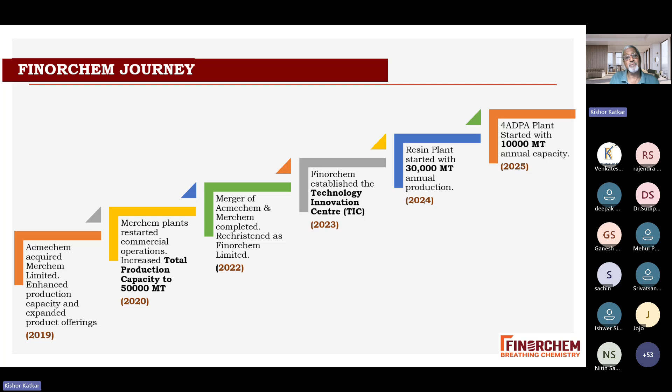Just to go very fast, we have all the standard antioxidants like 6-PPD, TMQ. In addition, we have 100, that is DTPD. Many big companies have stopped this production, but we continue and we are running full production. And then additional BL50, these are acetone condensates. We have some non-staining antioxidants of the MBI series, as well as CPL and 445.

Peptizer, again, I told you, we used to have a PCD base, which we have stopped. Now we have an environmentally friendly DBD based peptizer. Then all standard accelerators like MBT, CBS, sulfonamides. The green I have mentioned deliberately, these are the new products which I will just touch on. TBSI, this is a new sulfonamide, which will be replacing DCBS because DCBS is on the borderline of nitrosamine. In Japan there is a restriction on the volume, so we will not go there. Then DN, this is a one-pack accelerator mix for EPDM.

Then a lot of processing aids. Again, you will see the two green ones, Acmetol JV46F and Acmetol S 2000. These are basically for silica, good dispersion. Then silica coupling agents like Finosil 69, SI69 equivalent. Then carbon black coupling agents like Mernox MMH, and IDH. These are all equivalent to Otsuka products.

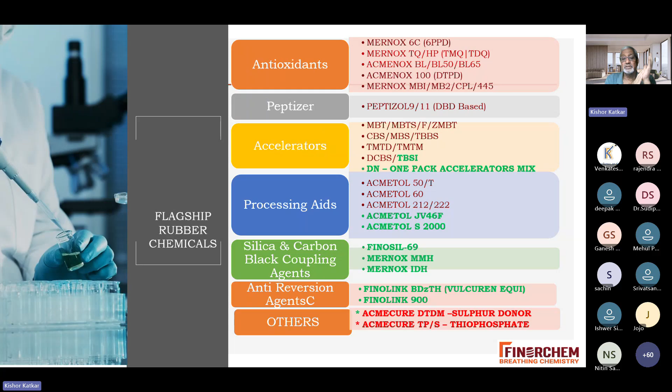Then I told you in 2024 we started the resin plant. We have all types of resins, tackifier, super tackifier, then heat reactive resins. I will not go into that; maybe another special lecture we will take.

Cut and chip resistance, it is an Indian product, CCR 120. These are improvements for the conveyor belts which are used in the minings.

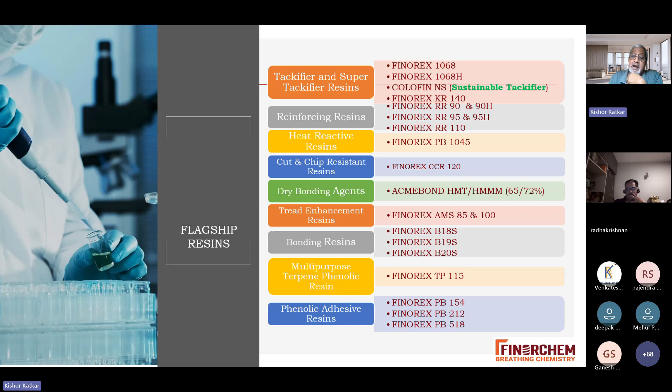So with this overall, we'll not go into details about the product, but we have the widest range of rubber chemicals, specialty rubber chemicals, anti-reversion agents, and resins. So with that, I'm going to our topics of today.

So my flow will be vulcanization in brief, sulfur accelerators, other crosslink systems, retarders, and the nitrosamine issue.

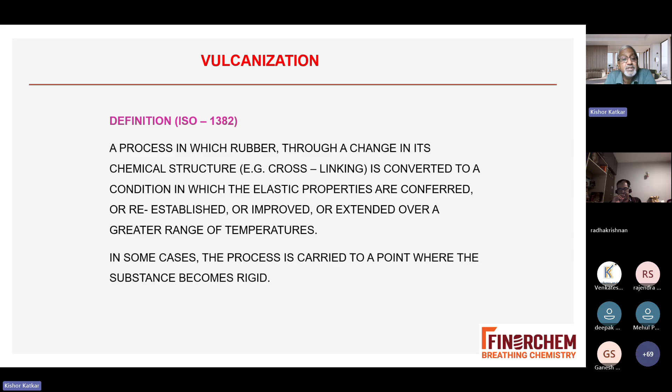What is vulcanization? A process in which rubber, through a change in its chemical structure, that is crosslinking, is converted to a condition in which the elastic properties are conferred, because rubber itself is elastic, or re-established, or improved, or extended over a greater range of temperature. In some cases, the process is carried to a point where the substance becomes rigid, that is ebonite.

Properties of vulcanizate are of two types. One depends on the network structure, which is basically from the vulcanized systems, and the curing systems participate. Depending on network structure: elasticity of the rubber vulcanizate, resilience, wear and tear properties, tensile strength, tear strength, abrasion resistance, modulus, hardness. So all these depend on the network structure, that is vulcanization, the crosslink system.

Aging properties are, to some extent, you will be surprised, because we always think whenever aging comes, you are concerned with the antioxidant you can improve, but no. Even the network structure also contributes to the aging property to some extent.

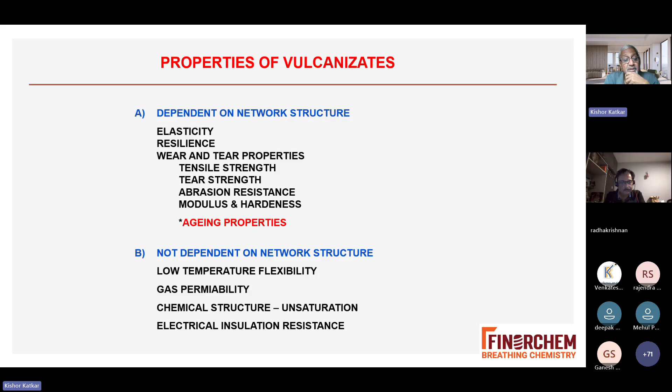There are some properties which are not dependent on the network structure, mainly on the polymer: low temperature flexibility, gas permeability, chemical structure that is unsaturation, and electrical insulation resistance.

Incubation period is a warming up period. Rubber compounds get heated to curing temperature due to the thermoplasticity of uncured rubber. Modulus comes down; this is a physical process, there is no chemical process. Rate of warming up depends upon the temperature difference between the heating medium and the rubber compound, thermal conductivity of the rubber compound, and the configuration of the rubber part.

Rubber compound is a very bad conductor of heat, and in case of thick articles, the warming up period can be very long. You may have to do separate warming of thick articles either by electrical heating or hot air, in order to give a lower vulcanization time.

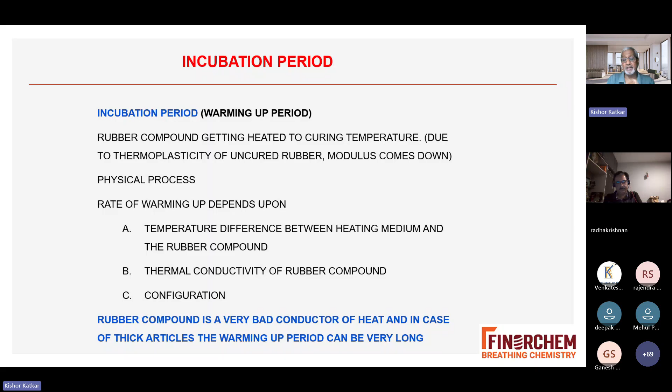Induction period is nothing but the scorch time or mold flow time. It's the time interval at the curing temperature during which no measurable crosslinks can be observed. This period depends upon the polymer, curing system, and heat history. Induction period is a safety margin in processing of the stock, and it indicates the storage life of the stock. Induction period must be adequate for the processing involved, and it continuously gets reduced during processing or storage at high temperature.

So again, it depends on whether it is a simple molding or whether you are building the product. This scorch safety is very important for that type of product when your product is being built, whether it is a hose, whether it is a tire, whether it is a conveyor belt.

Too long curing time in hot air or open steam curing is a disadvantage, so where you require a very short curing time, if it is long, you will find sagging and de-shaping of the product in hot air cure. Too short, you get scorching during processing, improper fusion of components, flow cracks, and bad knitting during molding.

These are all important to reduce rejection, because if curing is too short, your proper product will not be there—there will be cracks, flow will not be proper. This is all very important, because I am telling you, for the non-tire industry this is very, very important. We do a lot of good formulation, we use good polymers, we use good raw materials, but we don't give importance to the processing as well as the proper vulcanization system.

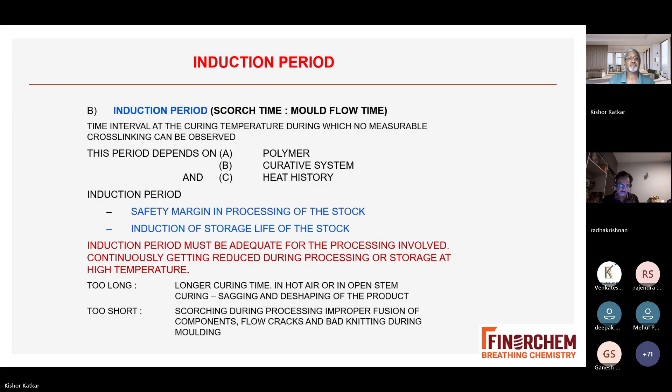Vulcanization time: the major part of the cure time should be short to achieve a faster production cycle. Again, this depends upon the product.

The plateau is a very important part. It is the time period at curing temperature during which the physical property remains constant at the maximum value.

Why is it important? Because a long plateau is essential under practical conditions. During production at the factory level, particularly in non-tire products, overcure cannot be avoided. When overcure occurs, the curing will be non-uniform, the properties will be non-uniform, and then your performance will be non-uniform.

Curing of thick articles: the temperature at the center may not even be attained. This happens when you have thick articles like dock fenders, solid tires, rollers, engine mountings, pre-cured tread.

When you are curing this, what do you observe? During curing of a thick article, the temperature at the center may not even attain the cure temperature by the time the external surface is cured. And by the time vulcanization is complete at the center, the external surface is overcured. So this is a very practical problem.

So how do we handle that? This is very important because once your vulcanization system is better, giving a good plateau, some variation in the vulcanization time will take care of uniform physical properties even for thick articles.

There are also V belts and conveyor belts. These are also thick and long rubber articles. They are normally produced discontinuously with overlap joints, and the joints end up getting a double cure. Normally now people are using roto cure, etc., where continuous curing is done.

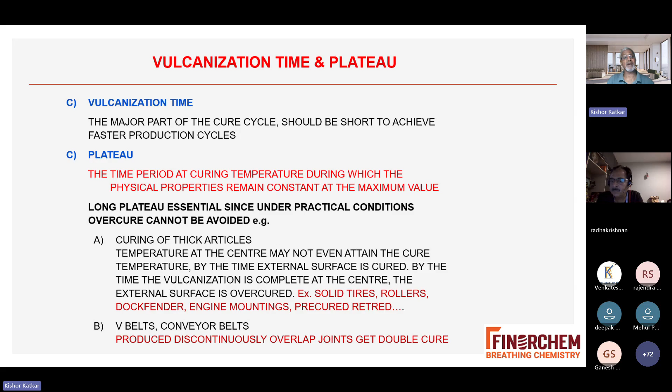Reversion: in spite of that, what we observe is that only in the case of natural rubber, polyisoprene, and butyl—wherever double bonds are more—with a normal sulfur cure, reversion occurs.

What is reversion? Physical properties like tensile strength, tear strength, modulus, and hardness drop. Elongation at break increases because elongation is inversely related to modulus. The surface may become tacky because if hardness and modulus go down, the surface becomes tacky, and resistance to aging goes down.

Degradation of physical properties is due to partial loss of cross-linkage during the breakdown of polysulfide cross-linkage. You can see here the vulcanization curve of modulus against cure.

In case of natural rubber, once you get the optimum cure, if you continue the vulcanization, you will get reversion. Your modulus comes down, and obviously the performance comes down as well.

In the reverse case, with synthetic rubbers like SBR, polychloroprene, nitrile, with certain cure systems, what you observe is marching modulus. What is marching modulus? The modulus will continuously go up—even after vulcanization, even during service, the modulus keeps increasing. But that is also not acceptable.

Suppose you want to maintain the hardness for something like pre-cured tread or tread in a car tire—you want to maintain a hardness of 64, 65. But because of this effect, the modulus will go up and your physical properties will change. That is also not desirable, but okay, we will discuss that.

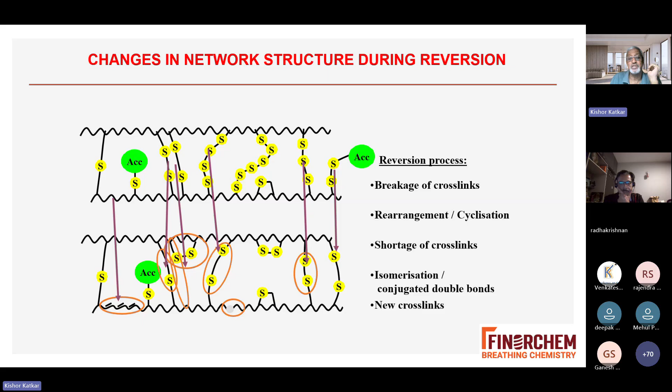And obviously there is a new crosslink also happening wherever there is a pendant group of sulfur. Now, sulfur cure with normal sulfur, when you are using 2 to 6 part, what you observe is monosulfide, disulfide, and polysulfide. Mono and disulfide linkages are thermally stable, and polysulfide linkages are unstable.

Why? Because if you look at dissociation energy, in carbon-carbon, which normally happens in peroxide cure, the dissociation energy is highest at 335 kilojoule per mole. When you go to monosulfide it is 310, disulfide it is 280. But when you have polysulfide, you can see 142. So when the sulfur is more than 4, the dissociative energy required to break the CC bond is much lower.

That is why whenever reversion occurs, you will observe that polysulfide linkage will break down to monosulfide or disulfide. So now, why this mono, di, and polysulfide? What are the advantages and disadvantages? Because for some products, where flexibility is required, these are good—we'll see that.

So polysulfide linkage, what are the advantages? It gives better tensile strength, better tear properties, and in natural rubber, it gives flex and fatigue resistance. So there are some products where these properties are predominantly required to get the highest performance, like pre-cured tread. You have tire bonding, side wall, conveyor belt—these are very important.

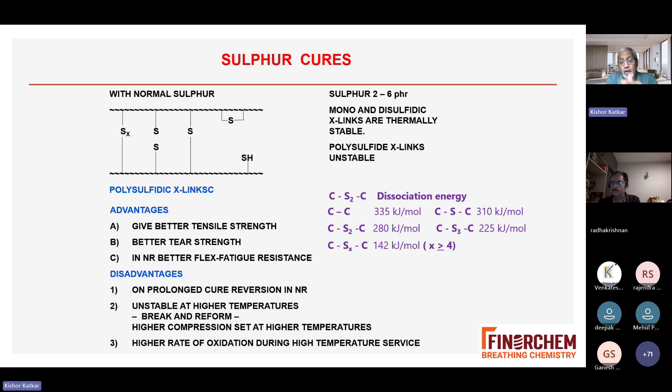We'll see what are the disadvantages. On prolonged cure, reversion happens in natural rubber, as we saw in the previous slide. It's unstable at higher temperature, breaks and reforms. Higher compression set at higher temperature, because once your polysulfide linkage is broken into monosulfide or disulfide, compression set at higher temperature will be higher, and there's a higher rate of oxidation during high temperature service. Even aging properties get affected. Though you can partially compensate using antioxidants, if you have overcure, I'll show in the next few slides how even aging properties get affected.

Normal sulfur system is normally above 1.5 phr, but you have seen the advantage in natural good wear and tear property, good flex property. Disadvantages are reversion, poor aging characteristics at high temperature, poor compression set—resistance at high temperature is less. Now, what are the options?

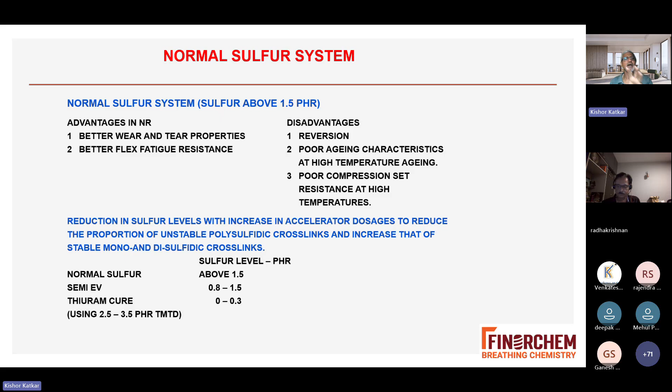Semi-EV is a compromise between normal sulfur and EV system, around 0.8 to 1.5. Thiuram cure is basically a sulfur donor system, around 0 to 0.3 of sulfur, where you use sulfur donor at 2.5 to 3.5 phr. We will touch on this a little on the next slide.

Now you can see here the modulus with normal sulfur, semi-EV, and EV. As your cure time increases, with normal sulfur there is reversion, modulus will come down. EV gives you a slightly plateau, your modulus is maintained, and semi-EV is a compromise between normal sulfur and EV system.

Now you can see, for the same product, if you do aging, tensile retention versus aging period at 100 degrees centigrade by days. Normal sulfur, even during aging, the tensile retention is much, much lower. EV is better than normal sulfur and semi-EV, but Thiuram, the sulfur donor system, gives even better aging properties at 100 degrees centigrade.

So what is a sulfur donor? Chemicals which during cure release sulfur to give only mono and disulfide crosslinking. What are the sulfur donors? TMTD acts as a secondary accelerator as well as sulfur donor. TBZTD is a nitrosamine-free accelerator, also a secondary accelerator as well as sulfur donor. And DTDM, dithiodimorpholine, is only a sulfur donor, not an accelerator.

So TMTD, Thiuram, acts with a dual character as secondary accelerator as well as sulfur donor.

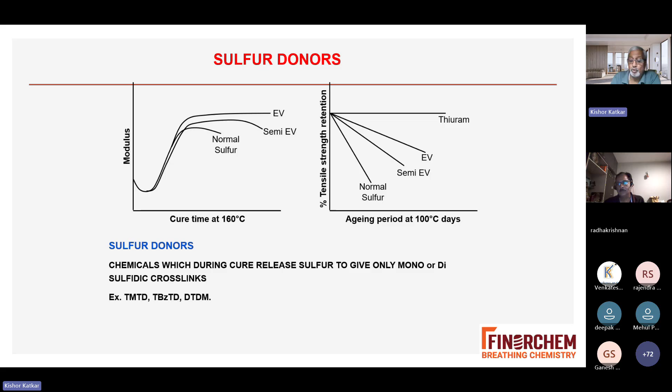Now, optimum cure. The rheometer gives changes in shear modulus with cure time. You can see in the graph T90 and T100. So how do we come to a conclusion about optimum cure? It's very simple, people say go by rheometer to find out T100. No, now you can understand what I'm talking about.

Rheometer gives changes in shear modulus with cure time. Optimum time is taken at T90 because properties like tensile strength and tear strength are about their maximum at this stage of cure, since we normally talk about tensile and tear strength. However, not all properties of the rubber vulcanizate are at their optimum at this stage of cure. Tensile and tear are there, but you can see in the next few slides which properties are not optimum at T90.

If other properties are important, then these properties may attain their optimum value at a different stage of cure, which is very important. Optimum time is to be taken as the cure time at which the most important property desired in the final product is at its optimum balance.

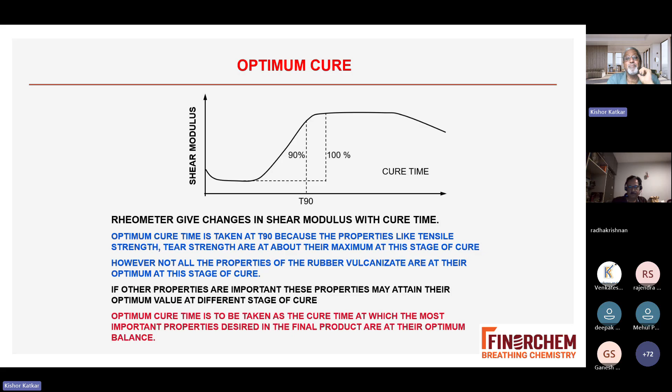Now you can see here, optimum cure for different properties. Tensile is normally, as I said, tensile and tear, you get T90. Afterwards there will be a drop in the tensile. If further curing takes place, that is called reversion. Hardness you can see is still slightly on the higher side. Modulus you can see, and elongation.

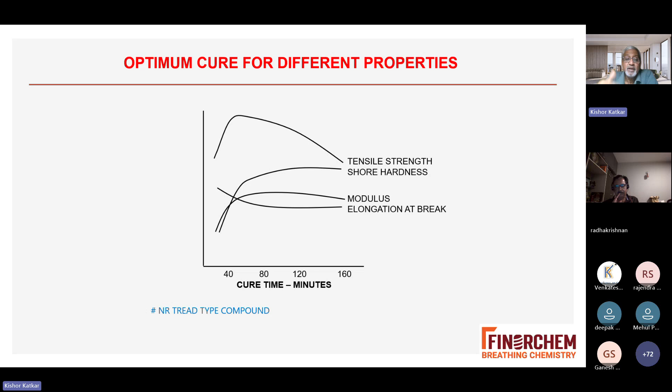These are with a natural rubber tread compound. Now you can see other properties.

In short, we will not go into detail. For each property there is a different timing of optimum cure. So your optimum cure will depend on which property you are looking for and which property is important for the final product's performance.

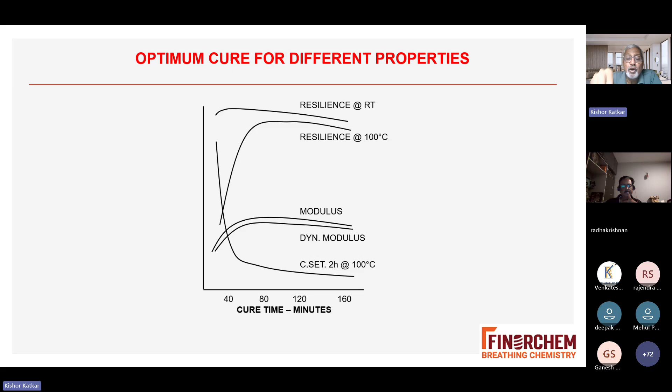Obviously, you have to add minutes to the cure time depending on the thickness of the part. That is additional. Now here you can see I have mentioned that even aging property is important.

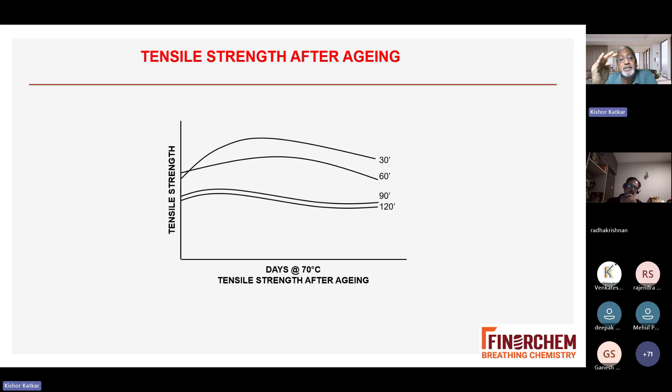In this case, tensile is cured at different timings - 30 minutes, 60 minutes, 90 minutes, and 120 minutes. What do you observe? 30 minutes gives the higher tensile originally, and 120 gives the lower. When you age this product, you will find there is a drop in the tensile strength. The higher the temperature during cure and the higher the time beyond optimum cure, the more you will find a drop in the tensile also. So these are also important.

Now, vulcanization comes with different degrees of steepness. You can see the first case here - this is the vulcanization system with a shorter reaction time, you go here and then it goes like this. Then you have the vulcanization system with a longer cure reaction time, it goes like this, like this, like this. So it is a long reaction time.

Then there's the vulcanization system with a marching modulus. You can see this is the vulcanization modulus, and this is your system with a long reaction time. In case of marching modulus, you can see it is not optimum yet, it goes on increasing. Then the ideal would be rectangular curves - you get very good scorch safety, a faster cure, and then a plateau.

So ultimately, the rubber technologist wants to optimize this - the curing system should be like that. Yes, it is possible to do that by using a mixture of accelerators, proper accelerators, and sulfur ratio, which we will see.

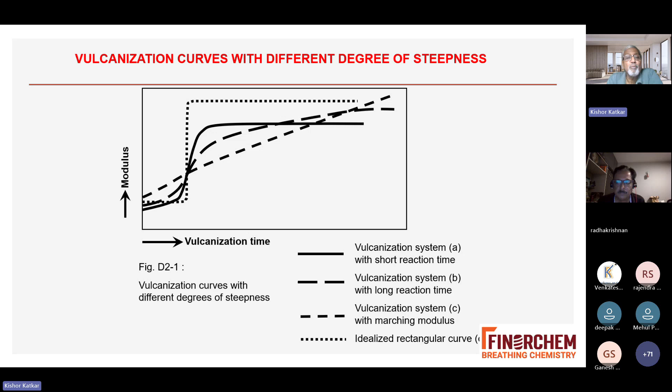Practical vulcanization. Temperature depends on the type of product, polymer and curative system, and the equipment and process used for vulcanization. Now you have heard about cold cure or room temperature cure, which is around 20 to 40 degrees - normally repairing of patches is cured at room temperature.

Hot air, 70 to 140 - so you can't go more than that. Steam cure, 100 to 200 degrees. And there are special cures like liquid curing medium, ultra high frequency, injection molding, electric heating, where your temperature can go up to 240 degrees centigrade.

Now, first, what are the requirements? External pressure - when is it required, why is it required? Unvulcanized rubber may contain traces of moisture from rubber compound ingredients, dissolved gases, traces of solvent - if solvent is used during processing, many people use it in hoses or during the bonding process, something like that. Sometimes moisture is generated during vulcanization, and sometimes moisture even comes from the compound itself.

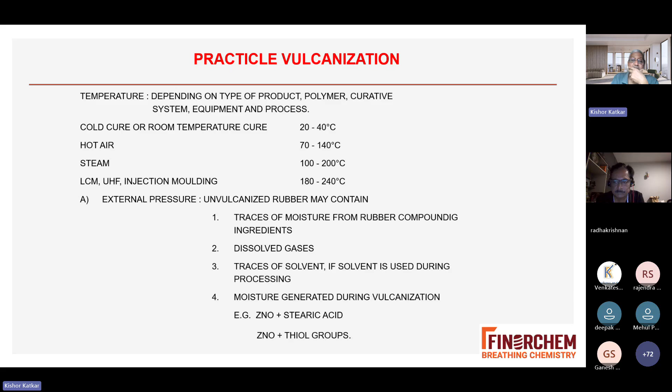Moisture generated during vulcanization reaction of zinc oxide and stearic acid, and zinc oxide and thiol groups, gives moisture that becomes part of the rubber compound. If this moisture remains and you don't give pressure during vulcanization, you will find bubbles in the rubber vulcanizate.

In case of cure temperature below 100 degrees, or in case of very thin rubber film like rubber threads, glues, or fabric, no external pressure is generally necessary. In hot air cure or latex cure, there is no pressure.

For cure temperature above 100 degrees, external pressure slightly more than the saturated steam pressure at the curing temperature is necessary. For example, suppose your curing temperature is 142, which is equivalent to saturated steam of 3 atmospheres. So above that, 1 to 2 means external pressure should be 4 to 5 atmospheres to keep the mold closed and give pressure during vulcanization, so that there will be no faults in the rubber vulcanizate.

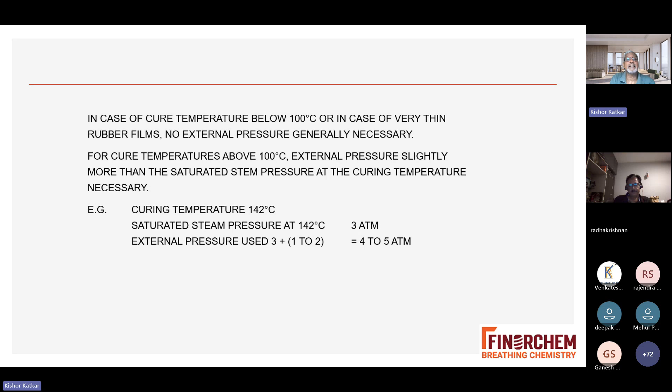Now, after this vulcanizing system, we will go for what type of accelerators and other curing systems will be there. Someone not from the rubber industry will ask, if an accelerator is required, why not just a few accelerators? It would be very comfortable for rubber technologists. But no, there are so many accelerators. We will go into a little detail on that - why so many accelerators are required, what are their functions, and how rubber technologists can utilize these accelerators to get better, optimum cures, faster cures, and no reversion, etc.

Now, curing system - what is the curing system? Selection of curing system is based on the base polymer. Natural rubber, nitrile, whether a double bond is there, whether it is saturated, EPM - a lot of things are there, that is the base polymer. Whether a double bond is in the main chain or side chain, and whether I can use a sulfur accelerator system, depends on the base polymer.

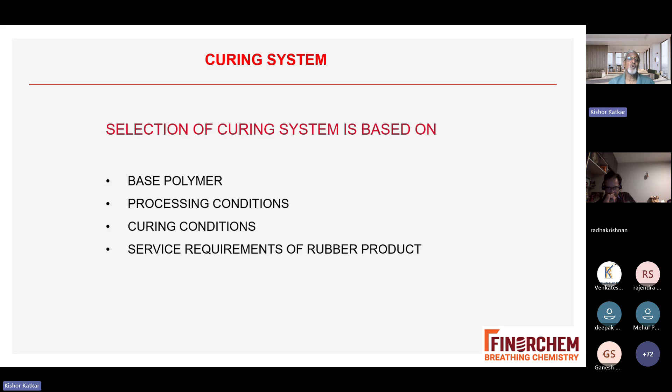Processing condition - what type of process, whether it's hot air cure, liquid cure, HAV cure, or continuous cure like for hoses, etc. Curing condition also, then service requirement of the rubber product - these four conditions are very important.

Now curing system - we have seen it depends upon the base polymer, properties, etc. What type of curing systems are there? The most important - almost 85% of polymers use sulfur or sulfur-bearing material, because tire is almost 70% and tire uses sulfur and sulfur-bearing, plus non-tire. That is why 85% is sulfur-based. It's very comfortable, very economical, where we can use natural rubber, isoprene, synthetic natural rubber, SBR, butyl, PBR, EPDM, nitrile, XNBR (carboxylated nitrile), and HNBR (hydrogenated nitrile). All these rubbers have a double bond either in the main chain or side chain, which is required for sulfur accelerator crosslinking.

Organic peroxide - this is very important. What do you do when there is no double bond, like EPM, silicone? These saturated polymers don't have any other option - you have to use organic peroxide. But even for some polymers where you require special properties and good compression set, want a cleaner vulcanizate, lighter color, and don't want contamination - even polymers like NBR, PVC, HNBR can be crosslinked with organic peroxide instead of sulfur accelerator. So EPM, EPDM, silicone, urethane, chlorinated polyethylene, cross-linked polyethylene, VAMAC, PVC, NBR, HNBR - these polymers can be crosslinked with peroxide. Obviously, saturated rubber has to be crosslinked with peroxide.

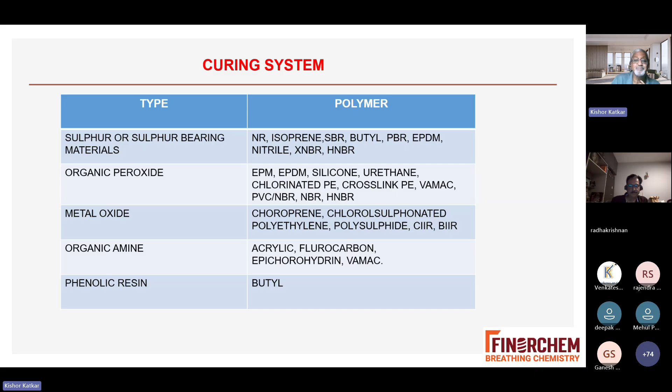A good curative system should give adequate scorch safety, fast rate of vulcanization, long plateau, and vulcanization with good physical property and good aging property. Obviously, once you get this, better performance.

Curative systems are decided by curing characteristics, design in the manufacturing process, and the functional requirement of the vulcanizates. This is very important - it depends upon the polymer, the manufacturing process, and very importantly, the functional requirement of the vulcanizate, whatever product you are manufacturing.

Different curing characters are desired in compounds designed for hot air cure. What is normally needed for hot cure? Very fast onset, because otherwise sagging and stickiness will happen as the surface gets oxidized, since in hot air, oxygen is present. So very fast onset of vulcanization, fast rate of cure at lower temperature.

As we have seen, at around 100 degrees in hot air cure, your balloons or textile fabric, gloves, latex - these are cured at a lower temperature. Open steam cure also requires fast onset of vulcanization, as there is again a possibility of oxidation and sagging and spotting in steam cure. So fast onset of vulcanization is required to get a proper shape.

For compression molding, adequate mold flow time is needed - it has to fill the mold properly. For injection molding, adequate mold flow time is required because injection molding is done at a higher temperature for productivity, so the mold should be completely full. So adequate mold flow time and good reversion resistance is needed, because many times in injection molding, the material remains in the sprue, so it should not overcure and there should not be reversion.

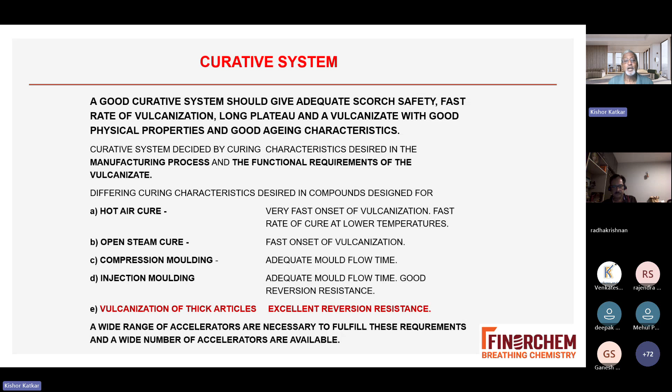A wide range of accelerators are necessary to fulfill these requirements, and a wide number of accelerators are available. Now you can understand why so many accelerators exist, and why many times you have to use a combination of 2-3 accelerators.

Accelerators are chemicals which increase the rate of vulcanization of rubber compounds with a crosslinking agent like sulfur. Now you understand who was the creator? Goodyear was the creator of vulcanization. He first used heat, and by that the rubber was vulcanized or cured, but the process was very slow. So in order to increase the cure rate, the accelerator was invented, and different accelerators came about.

What are the advantages of using accelerators? It's not only the rate of cure, but there are many advantages. First, increased output, reduced variability of cure. By using a proper accelerator or sulfur-accelerator combination, you can get a consistent cure rate, better physical properties, consistent physical properties, better aging properties, and better color of vulcanizate.

Why am I mentioning this? When you cure at higher temperature, this is more applicable to non-black products, white or colored products. If cured at higher temperature, you will find the color will be a darker or blackish shade. So if you want good color, you have to cure at lower temperature, and accordingly use the appropriate accelerators.

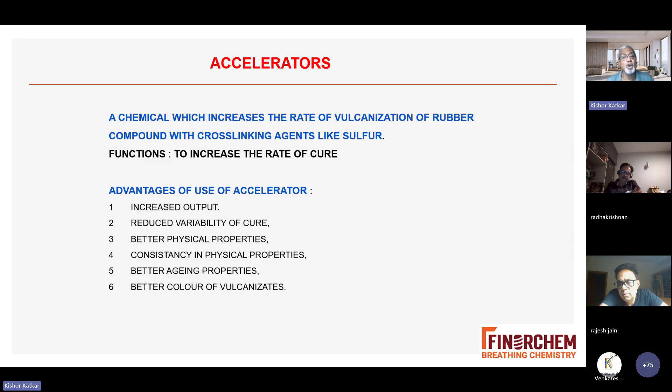Besides this, there are FDA accelerators. I think Mehul Patel was talking about nitrosamine-free, FDA approved, SVHC, and a lot of things are there. We will not go into that, but these are the basic advantages of using accelerators along with sulfur vulcanization.

What is the curative system? It consists of the type and amount of accelerators and the amount of sulfur in case of GP rubber, that is general purpose rubber. What are the general purpose rubbers? Natural rubber, SBR, polybutadiene - these are the general purpose rubbers. Why are they called general purpose rubber?

Rubbers which are mainly used by the tire and allied industry are called GP rubber. Obviously other rubbers can also be crosslinked - I told you NBR, IIR, EPDM, XNBR, HNBR, because they have double bonds either in the main chain or in the side chain, which can be used for crosslinking with sulfur and accelerator.

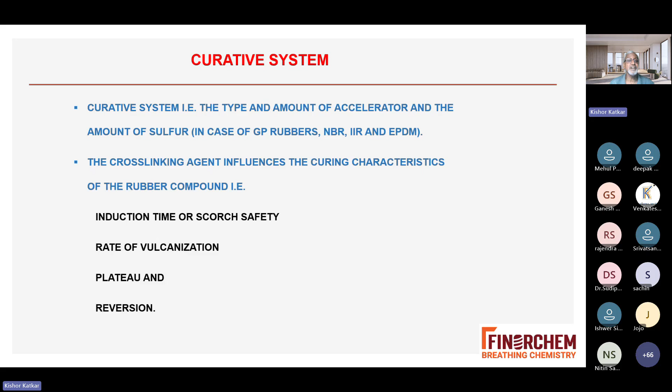The crosslink agent influences the curing characteristics of the rubber compound. What type of influence do they have? We have seen the 5-point system. Remember, the curing system does not participate in or contribute to the incubation heating stage - it contributes after that, in the induction time or scorch safety, rate of vulcanization, plateau, and reversion.

Looking at major quantity polymer usage, I told you general purpose polymers are cured with sulfur as the crosslink agent - NR, SBR, IR, EPDM, etc., XNBR, HNBR, and special purpose polymers like NBR and PVC are also discussed. These rubbers can be crosslinked with sulfur accelerator. Sulfur accelerator is an economical curing system and is used mainly by the entire tire industry - that is why I told you 85% of rubbers are crosslinked by the sulfur accelerator system.

Accelerator for sulfur vulcanization - there is an old classification people used based on their activity in natural rubber based compounds: slow accelerator, normally cure temperature 120 to 140, medium fast accelerator, ultra accelerator, and super ultra accelerator for room temperature. But now the classification has changed to something more relevant.

Thiazole and sulfenamide class, thiuram class, and dithiocarbamate class - these are all acidic accelerators. And there are basic accelerators like guanidine, that is DPG, DOTG, and amine class, HMT, HMMM.

There are a lot of others we will discuss after. And there is a synergy between acidic and basic accelerators.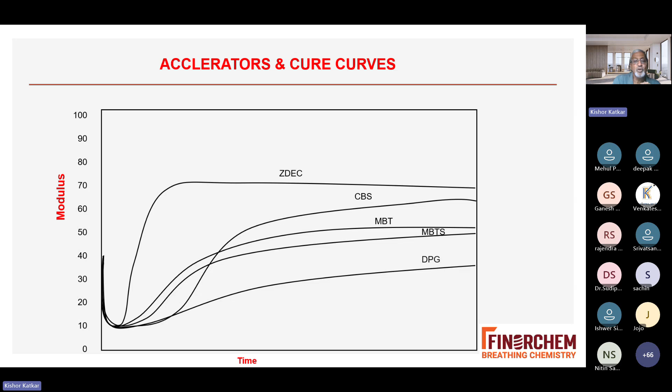ZDEC gives a very peaky cure, very short scorch time, very fast cure. So it is not normally used in general purpose rubber.

You can see even sulfenamides - why so many sulfenamides are used? CBS, TBBS, MBS, DCBS. You can see that CBS gives better scorch safety and faster cure.

So for products like molded products or in the non-tire industry, for hoses, for pre-cured tread, for small tires, you can use CBS very well. You get better scorch safety and good physical property.

But when you are going to thicker articles like pre-cured tread or bigger tires - passenger car tires or truck tires or conveyor belts - you can use TBBS type of things, which gives higher scorch safety.

There was also MBS, which has very good scorch safety and was predominantly used by the tire industry for truck tires and bigger tires earlier, mainly for bias tires, because MBS has a problem with nitrosamine, which is carcinogenic.

Slowly, people have gone away and discontinued use of MBS. Even the tire industry has stopped, and non-tire industry is also slowly moving away, because it can be replaced by CBS or TBBS easily - obviously not one-to-one.

You have to adjust some dosage, some retarder, or a combination of that. Anyone can help you in that case.

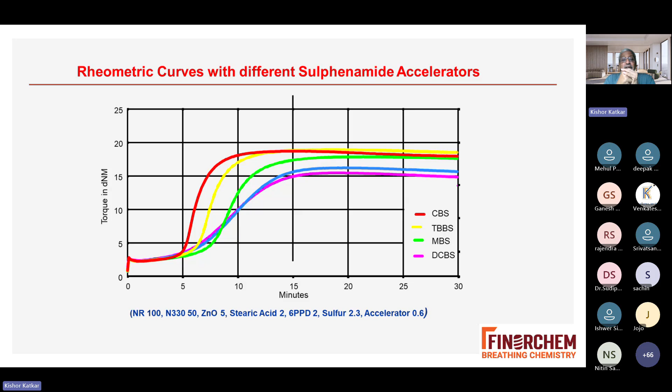I will not go into much detail on that because these are general accelerators. First, MBT, MBTS - these are thiazole, mainly used in general purpose rubber by the non-tire industry, but they are also used for butyl tube cure along with TMTD, MBT or MBTS.

The footwear industry mainly uses MBTS, but also uses F. F is a blend of MBTS and basic accelerators - a blend particularly given to the microcellular footwear industry.

This is an Indian-made product, I will tell you - this is not available outside of India. MBTS is also used for hoses, footwear, cycle tubes, etc.

ZMBT, zinc salt of mercaptobenzothiazole, is mainly good for the latex industry - a sensitizer for latex used in foam, thread, etc. F, as I told you, is mainly used for the footwear industry blend, but is also used for sponge, ebonite compound, hot water bottles, as well as airbags.

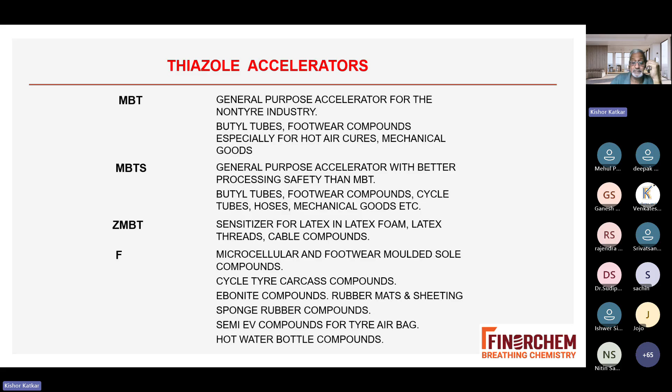Then a lot of sulfenamides, I think we discussed about that. CBS is mainly used for the non-tire industry as well as for small tires, cycle tires, two-wheeler tires, Neolite soling compound, if you want better scorch safety.

What I observed, maybe people remember, in the north side people were shifting these accelerators. In winter they want a fast accelerator because the temperature itself was low, so they used MBT, MBTS because scorch safety was getting sufficient. But particularly in summer, when the temperature goes up to 50, they were shifting from MBT to CBS because they want better scorch safety. Your compound should not scorch. We should have better scorch safety, better flow, etc.

So you can understand, even with the same formulation at a different temperature, meaning the room temperature, you can change and maintain the same cure rate and avoid rejection of your compounds.

MBS, I think we discussed about that, particularly earlier used in truck and bus. It was a very good product, very good scorch safety, very good cure rate and plateau. But unfortunately now, because of nitrosamine, it is discontinued.

DCBS, I told you, gives the highest scorch safety. So mainly it is used in steel cord compound and in unvulcanized products like hot retread, conventional system, where that hot retread has to be stored for 6 months. Normally TBBS, CBS will scorch and give the scorch. So DCBS is used in what they call hot tread or camelback compound, and cushion gum compound also normally requires very high shelf life. Obviously insoluble sulfur, there you have to use them.

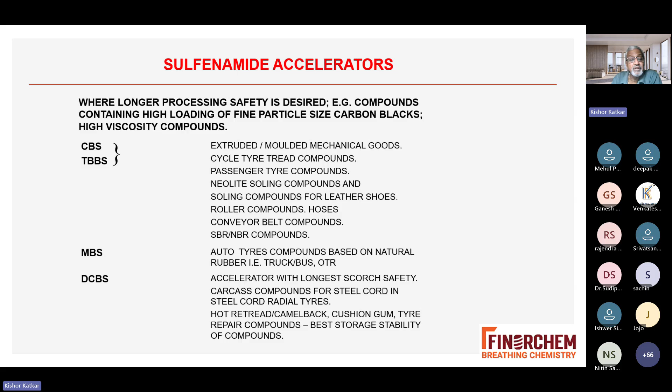Now, very important: zinc oxide and fatty acid activation. What I have proved is that if you don't use the proper optimum dosage of zinc oxide and fatty acid, you will not get a proper cure.

The graphs are not very clear, but you can see here there are 4 compounds: A, B, C, D. In A, natural rubber, antioxidant, common carbon black is common, zinc oxide. In the first case, the compounder has forgotten zinc oxide and fatty acid. Now you can see there is no curing, it is going flat.

Then in the second case, he has used zinc oxide but forgotten fatty acid, that is stearic acid. It is slightly better, the modulus curve is like this, it takes more time. In compound C, he has used stearic acid, but it is on the lower side, not sufficient, so you get a curve like this.

In the final compound, with optimum zinc oxide at 3 phr and fatty acid stearic acid at proper phr, you get proper cure, good scorch safety, good cure rate, and good modulus. So what you understand is, when you are talking about sulfur and accelerator cure, you require activation with zinc oxide and fatty acid at a proper dosage.

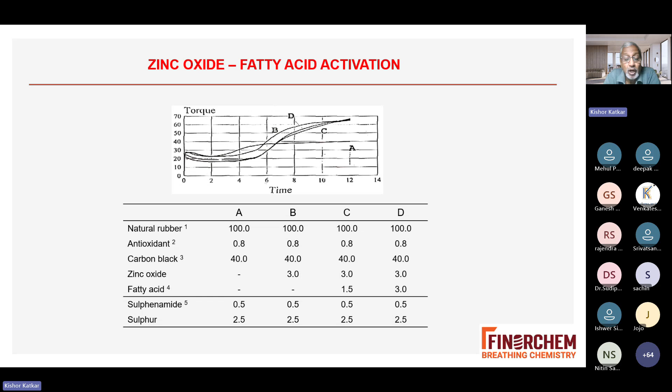So you can see the properties also. Now, A, B, C, D: A is no zinc oxide or stearic acid, B is only zinc oxide, C is less stearic acid, D is proper zinc oxide and stearic acid. What you observe is scorch safety is not bad, but T90 is affected.

So when there is no zinc oxide and stearic acid, you get the highest T90. As you start using activator, your curing time comes down. The major effect is on the modulus. When there is no zinc oxide and stearic acid, even after 25 minutes, your modulus is 4.4.

Then with zinc oxide, it's 9.5. With slightly lower stearic acid, 11.9. When you are using an optimum dosage of zinc oxide and stearic acid in case of sulfur accelerator, you get the optimum modulus as well as tensile. Obviously elongation and hardness too, you can see 46 and 62, and in between you get lower hardness, lower modulus, elongation. So in a nutshell, when doing the formulation, proper dosage of activators like zinc oxide and stearic acid is a must.

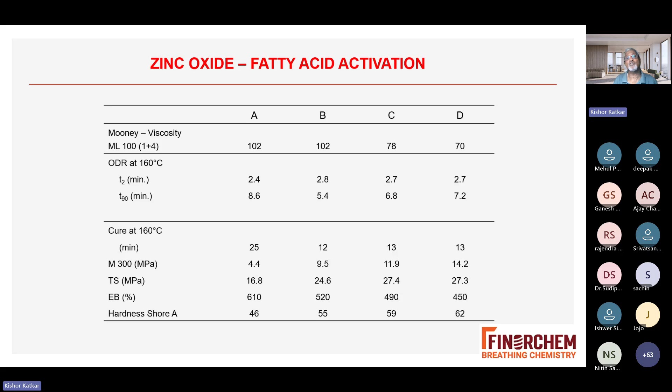Now, sulfenamide. When we talk about sulfenamide, we always talk about shelf life, quality of the shelf life. Why? What is sulfenamide? It's an oxidative coupling product. It is basically manufactured from MBT plus different amines. In case of CBS, it is cyclohexylamine. In case of TBBS, it is tert-butylamine.

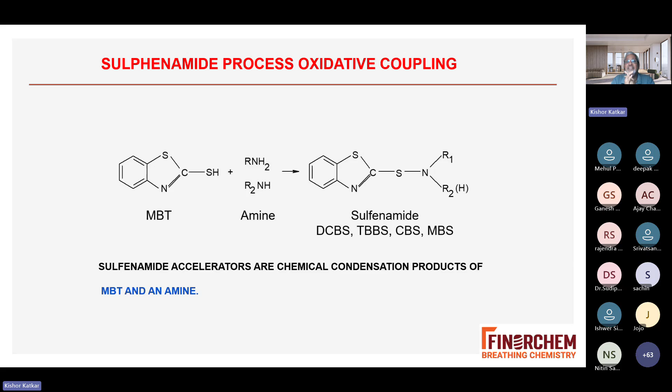So by using different amines and condensation products, you can manufacture different sulfenamides. Basically it is a condensate product. What happens now? So far this product is together, that is MBT and amine, your scorch safety is intact.

Vulcanization reaction does not proceed until all the sulfenamide accelerator quantity has been converted back into MBT and amine. Remember I told you about the synergy? MBT is acidic and amine is basic. When you use an acid and a base together, there will be a synergy and you will find a faster cure.

That is why in case of sulfenamide, you get a higher scorch safety, because MBT and amine is a condensed product of sulfenamide. As you go from CBS to TBBS to DCBS, your molecular weight increases, bigger molecule, so it takes more time to break into MBT and amine. That is why the scorch safety from CBS to TBBS to MBS to DCBS or TBSI is increasing, because it takes more time to break that molecule due to the higher molecular weight of DCBS and TBSI compared to CBS. However, once it is broken, you have better processing safety with the high dose.

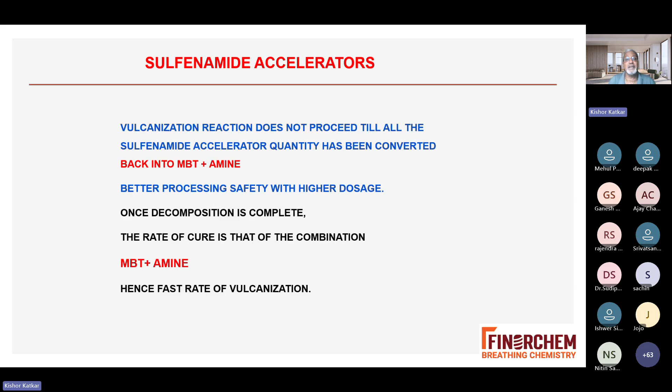As you increase the dosage, your scorch safety will increase. Once the decomposition is complete, the rate of cure is that of the combination. The higher the dosage, the higher the MBT and amine, hence the faster rate of vulcanization. That is why sulfenamide gives better scorch safety, higher cure rate, and the plateau.

You can see here, MBT has lower scorch safety, cure rate also not very optimum, and MBT modulus also not that good. But in case of CBS - this is one example I've given in sulfonamide, applicable to all sulfonamides - it has very good scorch safety, very fast cure, and then plateau.

That is why I said, what is the ideal vulcanization? I think I showed you that time. So sulfonamides, by using sulfonamides, you can give the ideal cure and you can control your cure system.

So what is the advantage of sulfenamide accelerators? Longer processing safety, faster cure rate, higher degree of cross-linkage, and very well suited for tire and similar tire-type compounds like conveyor belt, hoses, pre-cured tread, small car tires, engine mounting, and so on. There are many products.

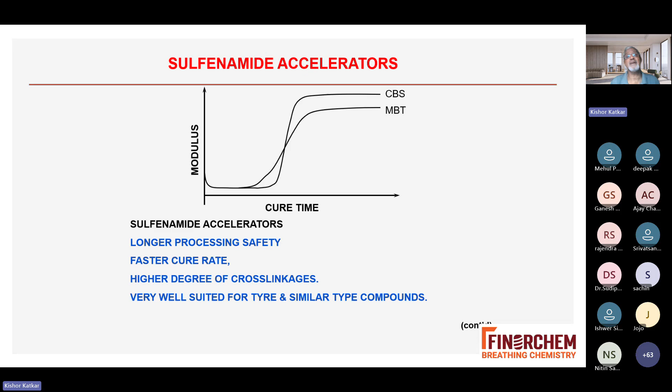So now, these sulfonamides are very important. I think this is not there. Okay, it is there, afterwards we'll talk. Then we will talk about the shelf life and the consistency of the sulfonamide afterwards. So coming to different accelerators.

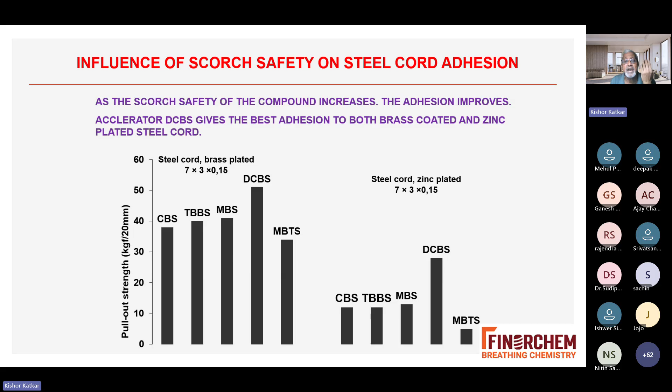Otherwise, what happens? Once the compound is cured, no bonding will happen—there will be failure. So DCBS gives the highest scorch safety, and it gives the highest bond strength when you are talking about the pull-out strength of the steel cord.

Now I was talking about the degradation of sulfonamide. Sulfonamides, though good, are condensation products of MBT and a different amine, but during high ambient temperature, or during exposure to high temperature during mixing, or during high humidity also, the sulfonamide gets reverted back to MBTS and amine. That is called hydrolysis, meaning you require a reasonably fresh sulfonamide.

Then the quality should be good. What do you mean by quality? When it converts, degradation happens—it forms MBTS, and MBTS is reflected in MI, methyl insoluble. You check the insolubility in methyl alcohol. Higher the MI, obviously more MBTS has formed, so your scorch safety will get affected.

Your T90 will not be affected, but scorch safety will get affected. So you should have a reasonably fresh product and a reasonably stable product. It also produces free amine—when your product gets decomposed, it will form MBTS and amine, and this free amine will act with MBTS and your scorch safety will further come down. Obviously, your T90 will come down too.

So the addition should only be at low temperature. That is why in non-tire industry, the sulfonamides are added on the mixing mill at a temperature around 90 to 100 degrees, so that the sulfonamide will not get decomposed on the mixing mill itself and the scorch safety will not get affected. In nitrile compounds sometimes they add it too, but at lower temperature. Tire companies do the mixing in internal mixers, but they don't let the temperature go more than 100 degrees centigrade. So this is the reason.

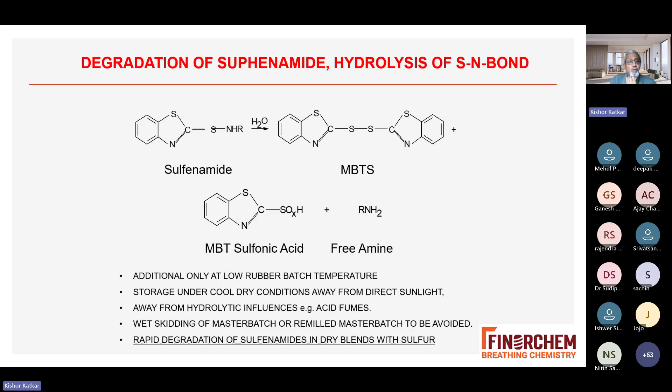Now these are a few others, I will go a little faster. These are the thiuram class: tetramethyl thiuram disulfide and tetrabenzylthiuram disulfide. What is the difference? TBzTD is made from benzyl, which does not form nitrosamine. All thiurams, that is TMTD, TMTM, are made from secondary amines like methyl, ethyl, etc. So any material—any sulfonamide, any accelerator—manufactured based on a secondary amine will form a nitrosamine either during storage, during mixing, or during vulcanization.

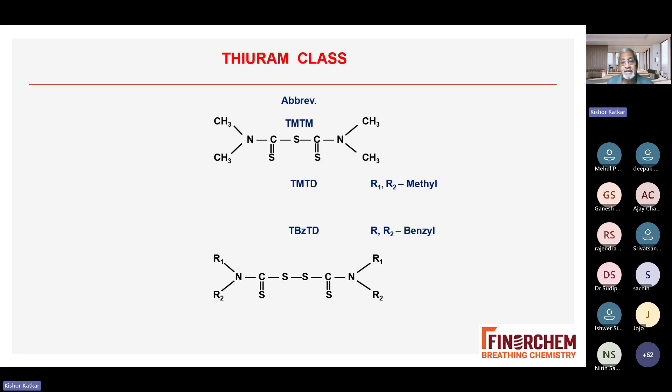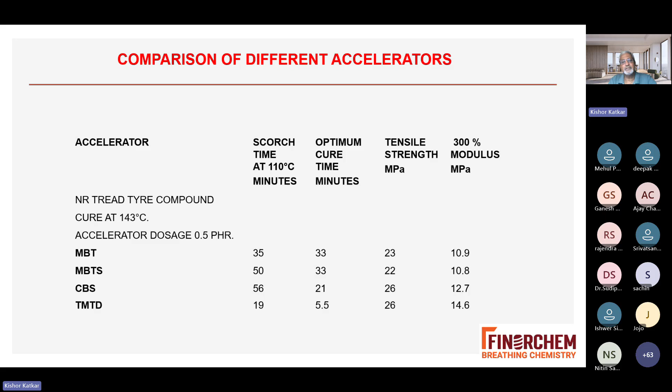TBZTD, the benzyl group, is not a secondary amine, so it does not form nitrosamine. We discussed different accelerators - MBT, MBTS, CBS, and TMTD were not covered yet. TMTD is normally not used alone; it is used as a secondary accelerator, but in some compounds it's used alone because scorch time is very low and optimum cure time is achieved. Properties and modulus remain the same. By using different accelerator types, your scorch safety and cure time can vary with the same dosage.

So again, what is TMTD and TMTM? Both are thiuram class. TMTD, tetramethyl thiuram disulfide, along with being a booster accelerator, acts as a sulfur donor and can be used alone. It can also be used as a secondary accelerator along with thiazoles as well as sulfonamides.

However, thiuram is used as a primary accelerator for butyl and EPDM because they have fewer double bonds and are very slow curing rubbers. So you can use TMTD. I told you butyl tubes are cured with TMTD and MBT.

TMTM is only a booster accelerator of its kind - it does not act as a sulfur donor, actually. TMTM can be replaced for TMTD. If you compare scorch safety, TMTM has a better scorch safety. Compared to blooming, TMTM has less blooming than TMTD. So sometimes to avoid blooming, you can use TMTM or a blend of TMTM and TMTD. It can be used as a primary accelerator for NBR, and for mercaptan modified grade CR you can use it.

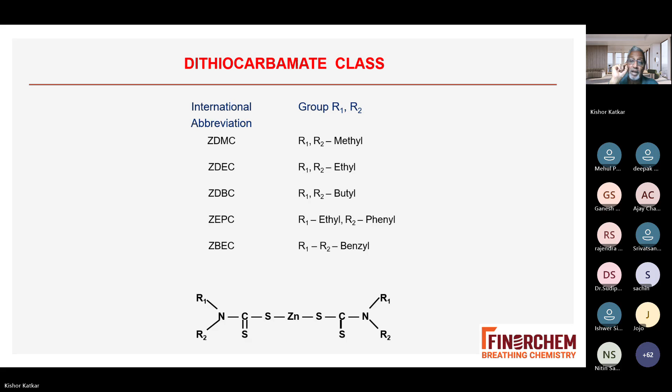Then dithiocarbamates - ZDMC, ZDEC, ZDBC. These use methylamine, ethylamine, butylamine, which are all secondary amines. The only last one, ZBEC, is zinc dibenzyl dithiocarbamate using benzylamine, similar to TBZTD which also uses benzyl. So ZBEC is the only nitrosamine free dithiocarbamate accelerator for EPDM as well as for latex.

I'm not going into details. These thiocarbamates are not normally used in solid rubber compounds. They're normally used for dipped products, or brightness of color, because you can vulcanize at lower temperature. It can be used as a booster accelerator for hot air cure since hot air cure is done at lower temperature, 100 to 120 degrees. Primarily, these thiocarbamates are used for latex compounds because you require faster cure and thinner articles.

Thiazoles and sulfonamides act as retarders for thiocarbamates. As an activator, basic accelerators like guanidines and amines can be used. ZBEC is the nitrosamine free accelerator among these.

Guanidine accelerator is a primary accelerator in thick walled goods like engine mountings and textile rollers because you require longer cure time, slow curing. But if you're wise, you can use a normal accelerator with an anti-reversion agent and get a faster, uniform cure even in thick walled articles like engine mountings, rollers, etc.

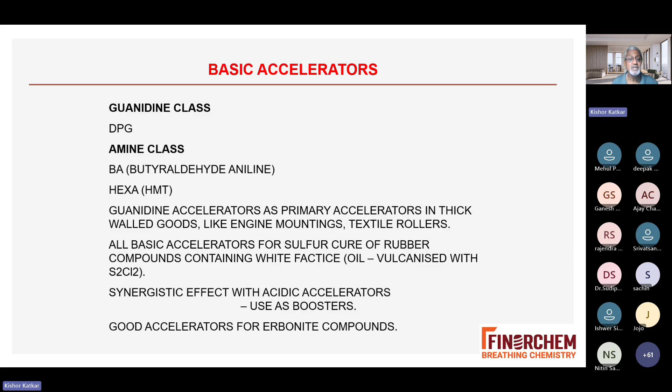All basic accelerators are used for sulfur cure of rubber compounds containing white factice. White fillers are slow curing, so in that case DPG is used. It has a synergy effect with acid accelerators and is a good accelerator for ebonite compounds - DPG is normally used.

So now this is just the conclusion I have given.

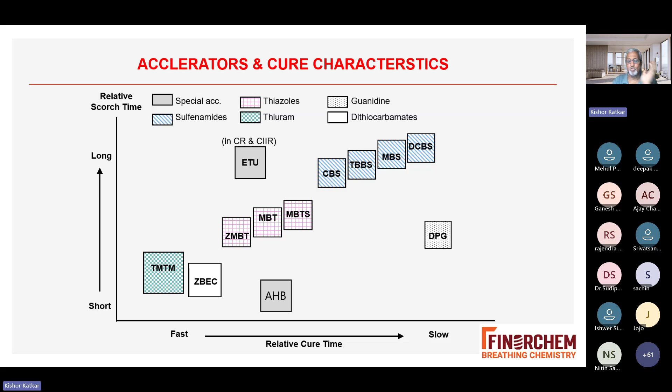So far, for all the articles like tires and conveyor belts, where you require good scorch safety, sulfenamide is used. MBT, MBTS in between give a relatively mid scorch safety and cure time. But TMTM, TMTD, ZBEC are coming with the lowest scorch safety and a faster cure. So this gives it in a nutshell. And DPG also is slow curing with a medium range of scorch safety. So it gives a conclusion of different accelerators for scorch time and cure time.

Now I have just given a few polymers where special systems are required. EPDM is very critical. EPDM is a non-polar material. Most vulcanizing agents, including accelerators, are polar. Hence the solubility factor in the rubber is very important while selecting the accelerators.

Blooming on the surface is observed if the content of accelerator exceeds its solubility limit. Any material which you are adding in the rubber compound beyond its solubility limit may go into the rubber compound at high temperature, but after curing it will bloom out because the solubility limit has been crossed. EPDM has that problem, being non-polar while accelerators are polar, and the solubility limit will come in the next slide.

And it has happened - you have stearic acid, microcrystalline wax, sulfur, TMTD - all these are a few names which are likely to bloom if you add more than the solubility limit. It's just like when you add sugar in water at normal temperature, it will settle out, suppose X. If you heat it, it will dissolve again. But when you come back to room temperature, whatever sugar you added at high temperature will come out. That is called blooming, nothing else.

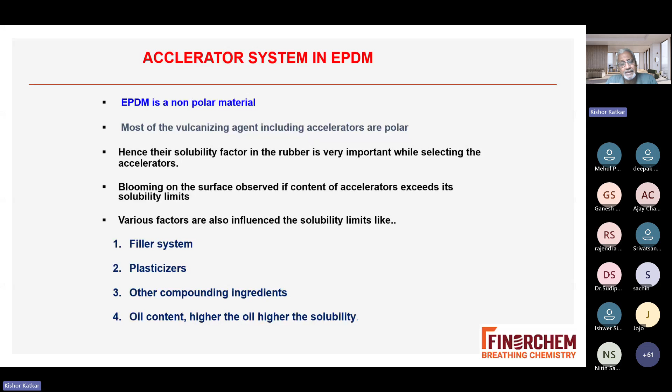Blooming on the surface is observed when the content of accelerator exceeds its solubility limit. Various factors are also included in the solubility limit, like the filler systems - because fillers are aminic or acidic - plasticizers, other compounding ingredients, and oil content; higher the oil, higher the solubility. So it is basically because of the aminic, acidic, or alkali nature of fillers and plasticizers.

We will come to a few others, I'm not going into details. These are, I think, general cure systems for EPDM - standard system, higher processing system, fast curing system, and system with low compression set. So depending on the EPDM application, you can use the system with the dosage which I recommended, so that you'll get a good optimum cure and good physical properties without blooming on the surface.

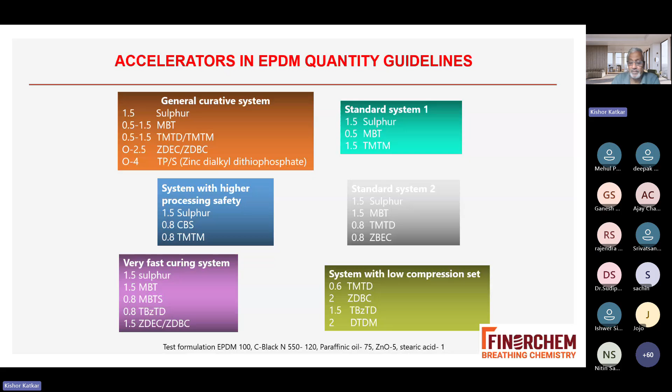EPDM quantity guideline: again, system with good aging resistance, system with higher elongation, and nitrosamine-free systems. Here I've mentioned ZBEC nitrosamine-free, and TPS - these are thiophosphates which have higher solubility in EPDM, and they don't bloom and are very fast curing. So you can use up to 2 to 3 PHR in EPDM.

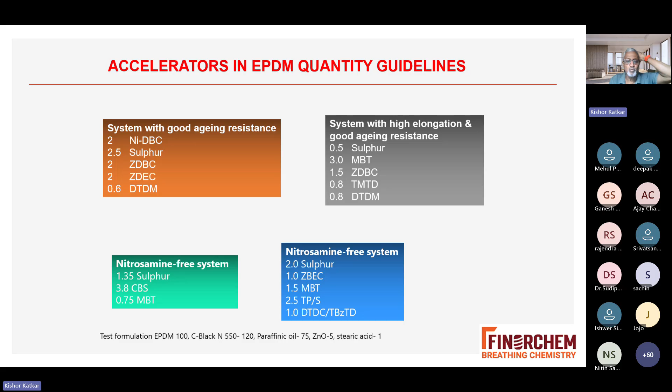Again, we'll go for chloroprene. I told you these are normally the metal zinc oxide and magnesium oxide cure system. The standard is 5 PHR and 4 PHR.

This is the curve, given here. If you use lower dosage, what will happen? You will not get the sufficient modulus.

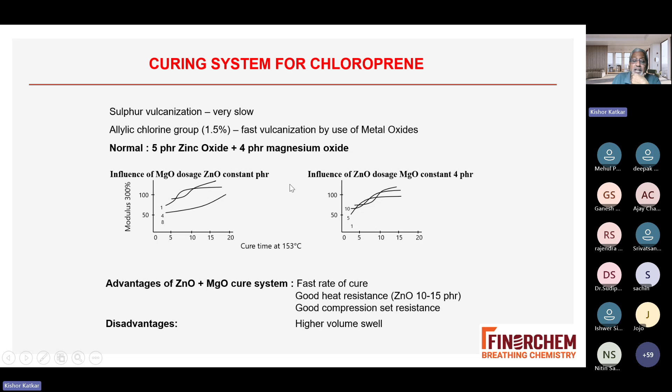What are the advantages of zinc oxide and magnesium oxide system? Faster rate of cure, good resistance. When you increase the zinc oxide, even in the normal cure system of general purpose rubber, zinc oxide gives better conductivity and better heat resistance when using higher dosage of 10 to 15 PHR. Good compression set resistance, but disadvantage is higher volume swell. If the product is used in water swelling or oil swelling applications, when you use zinc oxide and magnesium oxide, you will get higher volume swell.

So what are the systems? In polychloroprene, there are two types of grade: one is sulfur modified and the other mercaptan modified. In case of sulfur modified, which is normally used for good flexing property like V-belts etc., for very fast cure you have to use ethylene thiourea around 0.1 to 0.2.

Obviously, ethylene thiourea is not environmental friendly. There is one product I don't remember, I recall it's from Lanxess, which product. There are substitutes that have come. For mercaptan modified, along with zinc oxide, you can use ethylene thiourea.

Accelerators MBTS and TMTD act as a retarder in polychloroprene, not as accelerators. So for longer process safety, along with sulfur, you can use TMTD and TMTM.

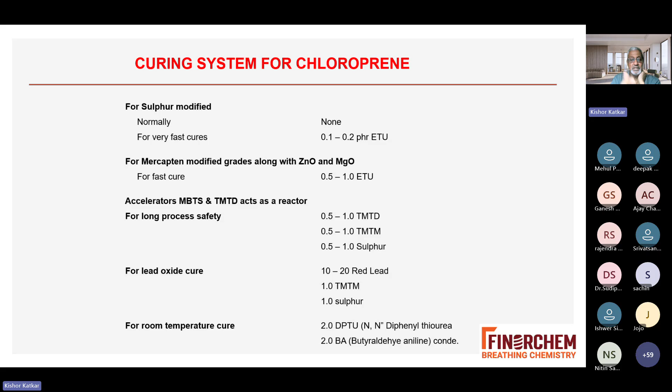For lead oxide cure, particularly for water resistant products, you can use 10 to 20 red lead and TMTM as a retarder with a little sulfur. For room temperature cure, you can use diphenyl thiourea along with butyraldehyde aniline condensate product, which I told you about, for room temperature as well as for latex. So these are the few applications for sulfur and all this.

Insoluble sulfur - I'll just touch on this one slide. What is insoluble sulfur and why is it required? Many times, when unvulcanized compound needs to be stored for longer time, either in your factory or as unvulcanized compound like hot retread or cushion gum compound, storage is typically 3 to 6 months, where normal sulfur will start cross-linking and the scorch safety will come down, making your compound useless for the retreader.

So addition of excess higher dosage of normal sulfur can cause blooming. In order to prevent blooming, a part of ordinary sulfur is replaced by insoluble sulfur. This improves bin storage stability, provided the compound is processed at a lower temperature. Insoluble sulfur is basically a polymeric product, so it will remain as a filler when the compound is at less than 90 degrees.

However, when it converts at high temperature during curing, this insoluble sulfur gets converted to normal sulfur and becomes available for cross-linking. This improves bin storage stability, but only if compound is processed at lower temperature. This means you have to store the unvulcanized compound at a lower temperature, not higher, because slowly the cross-linking will start even at 50 or 60 degrees if direct sunlight comes.

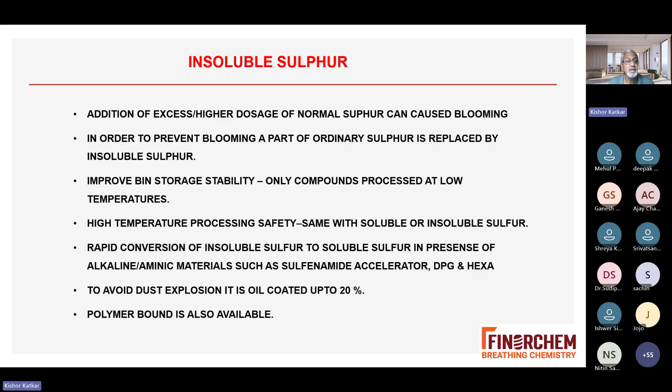To avoid dust explosion, it is oil coated up to 20%. Sometimes polymer bound sulfur is also available. There is also a sulfur donor we have heard about.

Why sulfur donor? This organic compound carries sulfur in a thermally labile, easily exchangeable form. Under normal curing conditions, free sulfur will release. So a sulfur donor will not react at normal temperature, it will remain as a filler. Under normal curing condition, free sulfur will be released, which in contrast to normal sulfur, gives only mono and disulfide.

That is why many times normal sulfenamide accelerator will be replaced by sulfur donor, in order to get mono and disulfide bridges and higher scorch safety. Because of their higher bond energy, these disulfide bridges are much more resistant to reversion and are responsible for the excellent heat resistance of the vulcanizate.

Replacing sulfur with sulfur donor results in less free sulfur in the rubber and leads to advantages such as improved physical properties, lower compression set, excellent reversion resistance, vulcanizate with improved aging resistance, and no sulfur blooming, provided it does not get exposed to higher temperature.

No contact staining with heavy metal because there is no heavy metal like lead, etc., which is there in sulfur. Higher processing safety. It also gives a better color, because sometimes sulfur gives a darker color, normal sulfur, lead, whether it is red or white.

Now we talk about peroxide also. I will not go in detail, but what is the difference between sulfur and peroxide? Sulfur works only on unsaturated rubber, while peroxide can also work on saturated polymers. You can use peroxide on unsaturated or saturated if you require special properties like compression set, etc. Sulfur gives good tensile, tear, and good flex property.

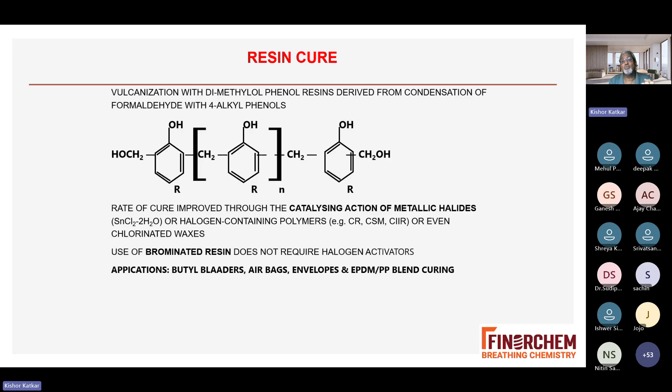Because EPDM is the rubber and polypropylene is the plastic, in order to blend them, resin cures are used. These EPDM-polypropylene blends are used for car parts like bumpers, etc., which gives a little bit of elastic properties to the plastic.

Retarders - I will not go in details. Retarders are used where there is a danger of scorching or pre-vulcanization. There are a lot of retarders, but normally now all people are using cyclohexyl thiophthalimide, that is PVI, effective at lower dosage, even in presence of PPD antioxidant, with no porosity and no effect on rate of cure.

Instead, use a sulfenamide wherever possible, or change from CBS to TBBS to MBS - your scorch stability will increase, however your cure time will come down. So this is the difference between the retarder and the sulfenamide. You can judge depending upon your requirement and the configuration of the product.

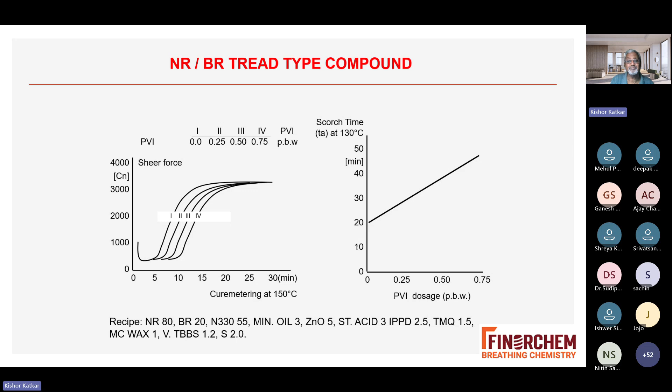Last, I'll touch on nitrosamines. What are nitrosamines? For the last 30-50 years, I have seen this topic come up. The rubber chemicals, mainly accelerators, are made from raw materials that include secondary amines.

We have heard about dimethylamine, diethylamine, morpholine - these are secondary amines. We heard about CHA, which is not a secondary amine; this is a primary or tertiary amine. So only secondary amines - we have heard about ZBEC, ZDEC, ZDBC - these are made from secondary amines.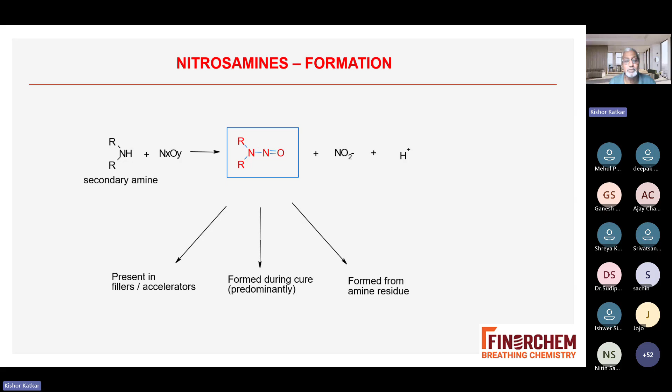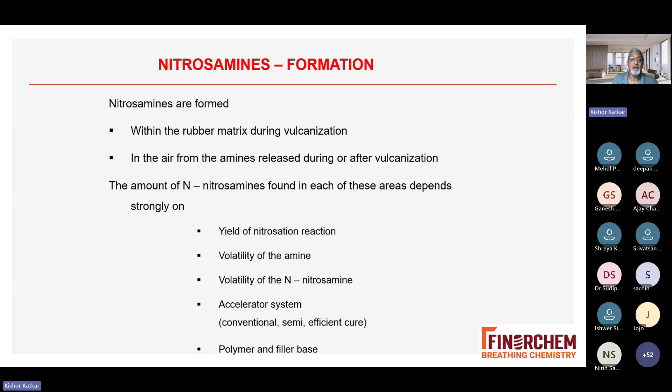So nitrosamines are formed within the rubber matrix or in the air from amine released during vulcanization or after vulcanization. The yield amount of nitrosamine depends on the yield of the nitrosation reaction, volatility of amine, volatility of nitrosamine, and the accelerator system. If you have a conventional system, you have less accelerator. If you have an EV system, you have more accelerator, so more nitrosamine will form. Polymer filler also matters because of the amine systems.

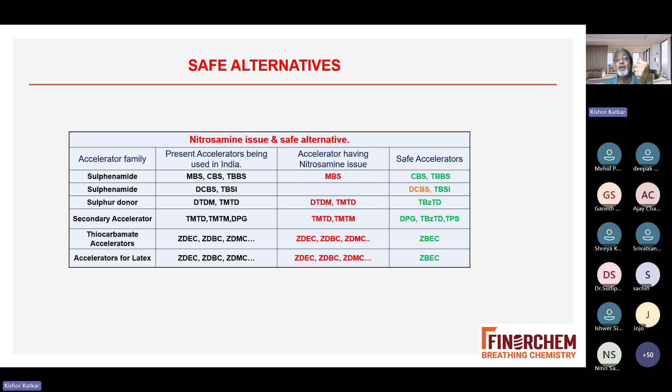So when you have a problem with secondary accelerators due to nitrosamines, you only have 2-3 options. TBZTD, TPS, and ZBEC can be used as secondary accelerators or latex primary accelerators for a nitrosamine-free system, particularly when you are exporting or your customer demands it.